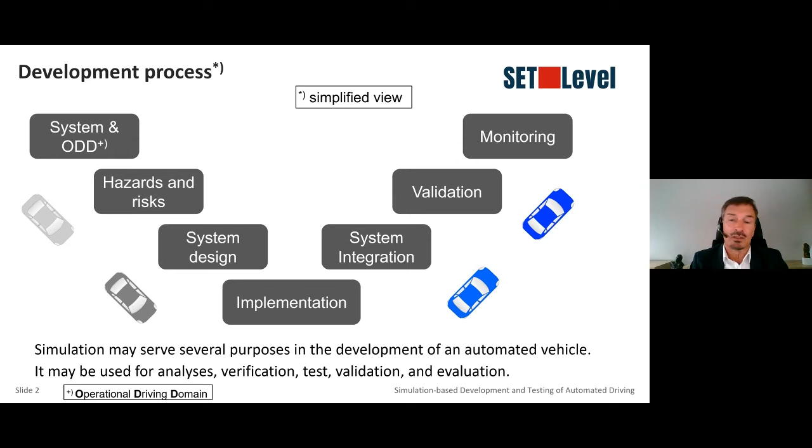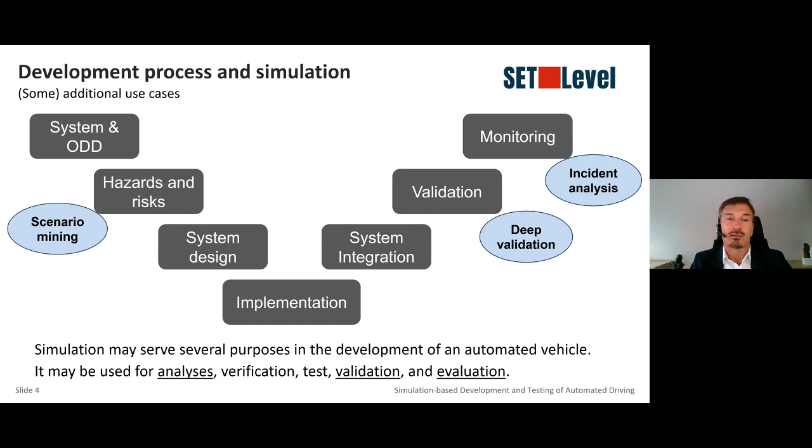So here's a reminder of what you might have seen in the morning, those 3 use cases. One was criticality identification and the hazard and risk analysis. Another one was component verification. And the third one was about closed loop analysis of system integration or system validation. Well, and in this talk, I will sketch 3 more use cases. One, again, concerning the hazard and risk analysis by mining for scenarios which are interesting, so to provide databases for this hazard and risk analysis.

The second one is near to the end of the development of the automated vehicle. It's the validation of this vehicle, once it's completely developed and one wants to look how safe it really will be on the road, so whether all your colleagues have provided sound work results. And after the vehicle has been brought to the road, manufacturers will still be forced to monitor it to look for potential flaws in the automation, and then some incidents might occur, and these have to be analyzed whether they are attributable to the automation or to circumstances not controlled by it. So these are the 3 use cases I will sketch very briefly in my 20-minute talk.

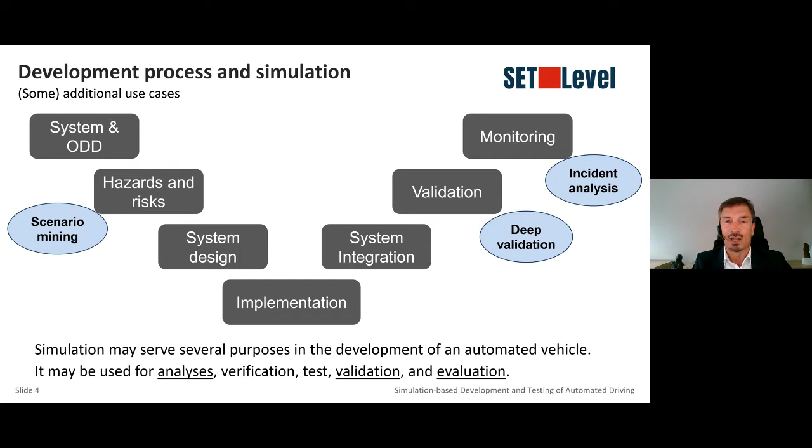The first one is scenario mining. That is to look broadly for all kinds of scenarios which might occur, which are interesting for the safety of our development, that is, which might turn out critical. So how do we do that? In SET Level, we develop a platform and simulation tools which implement the platform, which look in detail at scenarios, but they don't really generate scenarios; they are given scenarios. So to generate all these scenarios which we might be interested in for criticality analysis, we have to use some outside help. And luckily, this is available in the form of the tool SUMO, which is able to generate a broad range of scenarios by simulating traffic flows. And these traffic flows can be parameterized: dense traffic, less dense traffic, and other circumstances influencing that. And this we will then couple with a detailed analysis of what SUMO has generated.

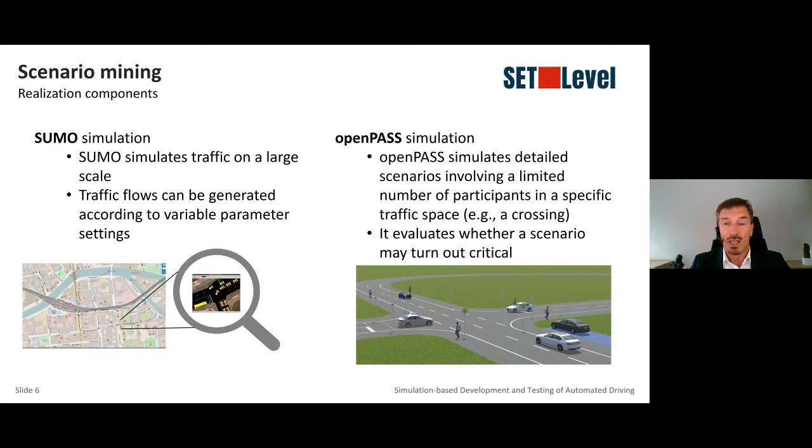Let's look at how those tools behave. We use SUMO on the left to generate all kinds of traffic situations at, say, a particular crossing, and then, as you might have seen this morning in the session on simulation use case 1, we can use OpenPASS to analyze what has been generated by SUMO on this crossing and look for potential criticalities, just as it has been proven able to do in the morning demonstration. And fortunately, our simulation platform is flexible enough to accommodate those two tools and let them interact to find critical scenarios.

Here's a little sketch of how this interaction behaves. We have 3 actors. On the left, we see the simulation management, which controls everything. Then we have in the middle the SUMO tool, which does the traffic flow simulation, integrated into our platform architecture by adding an FMU, functional mockup unit, wrapper. And on the right, we have OpenPASS, which is already integrated in the platform architecture.

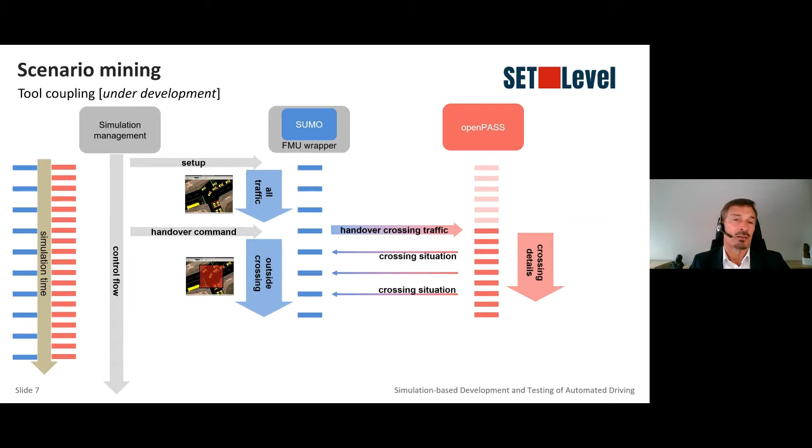The simulation starts by letting SUMO compute traffic flows until we have a stable flow, and then the really interesting thing starts. The simulation manager tells SUMO to hand over the situation at a particular crossing, and then OpenPASS takes over to simulate the traffic at this crossing in detail, while SUMO still takes care of the rest of the traffic flow through the town. But it is no longer responsible for the traffic on the crossing, which has been handed over to OpenPASS. And once OpenPASS has resolved the scenario given to it and produced a verdict whether the scenario might be critical or not, OpenPASS can hand control of the vehicles on the crossing back to SUMO, which is then again in full control of the simulation.

And the scenario which we have just studied via OpenPass in detail is then either stored if it has been interesting, that is potentially critical, or if it has been boring, well, then we can delete it. And then the same process starts over again. SUMO continues with its traffic flow simulation,

and at some point in time, the simulation management says, okay, let's again have a close analysis. And in this way, by having a broad, very flexible simulation of all urban traffic, we can generate a large base of synthetic data as a basis for the further hazard and risk analysis. So that was the first additional simulation use case, and it is currently under development within SET Level.

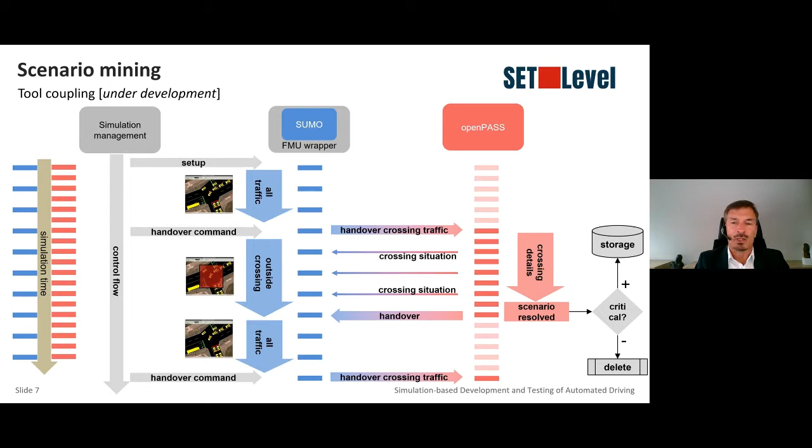So now to the second use case. It's about evaluating how safely the end result of the development will behave on the road. If you happen to remember what we did in PEGASUS with the simulation, well, that's pretty close to that. So what do we have to do to bring this step to life? So how do we set up our simulation?

First, we need to define in which traffic space we will do the evaluation. That is, we need a scenario catalog of logical scenarios, which covers the specific subset of the operational driving domain which we would like to analyze our SUT in. And then, well, we want to simulate our automated vehicle, so we better have a pretty good modeling of this vehicle, which we can feed into our simulation tools.

And then, of course, we need the simulation tool itself, and it better be, for this kind of analysis, a very credible simulation tool. Remember Hans-Martin Heinkel's talk this morning about the credible simulation process, which will be instantiated here to analyze how good the simulation tool will have to be and how this is going to be proved.

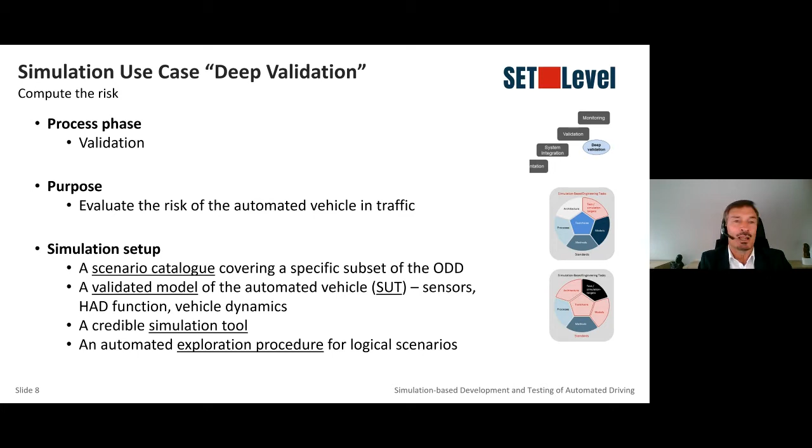Well, and then these are the ingredients for our core SET Level simulation. That is, we can execute single runs in our ODD. And well, with these single runs, we'll have to do our best to compute the overall risk which comes from bringing the automated vehicle into traffic. So this is a kind of elaborated procedure.

Now let's look in a little bit more detail at our task, what we have to do. We would like to compute the risk. How much risk is attributed to the automated vehicle in traffic? So the risk in a particular concrete scenario is here a numerical value, and depending on the parameters of the logical scenario, each parameter combination gives a concrete scenario.

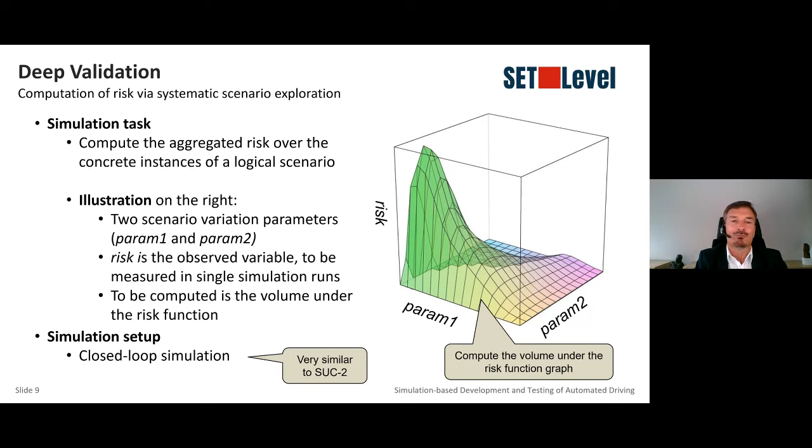That is, well, we would like to get the volume of the risk function graph by doing lots of single simulation runs. And this we do, well, in a way similar as Bernhard Riemann once defined what is the integral of a function, that is the volume under a function graph. That is by building it up, by approximating it,

making samples, in our case, sample simulation runs, which gives us single risk values, and then building columns around our single runs, our values which we have computed by simulation, and adding up the volumes of all these columns gives then an approximation of the volume of the risk function. That is an approximation of the risk we want to compute. And we do this, of course, in a, say, clever fashion.

If the risk is 0 or close to 0, we don't have to look too closely because, well, this area in the scenario space will not contribute significantly to the overall risk. So we can use our sample. We can choose our sample points very sparsely there.

You might have seen it on the right in the animation, where we have, say, a low density of sample points. And where it gets interesting, towards the left corner of this risk graph, we look more closely. That is, we do more simulation runs. And in this way, provided we have our credible simulation tools and well-modeled SUT, we get perhaps a good estimation of the real risk which comes from bringing the automated vehicle into traffic.

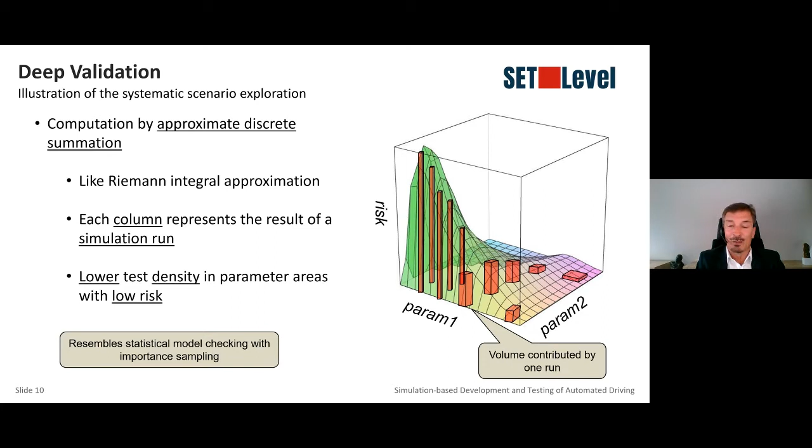Now, I promised you a third use case of simulation, that is after production, the incident analysis. The relevant process phase is monitoring when the vehicle is on the road. And of course, as you all know, manufacturers will mandatorily have to look at the behavior of the vehicle on the road and analyze the incidents which have been observed or which are observed in this phase.

And then, look for the cause of these incidents, whether they have been caused by the automation itself, by flaws in its design, or some situations which have not been fully foreseen during the development, which are maybe not really the fault of the automation, but the automation could behave better in these cases. Then again, the manufacturer will have to argue how to cope with these situations. And at first, he has to know the cause of this incident and what can be done about it. So we need a deep analysis of all these incidents on the road, and there will be many.

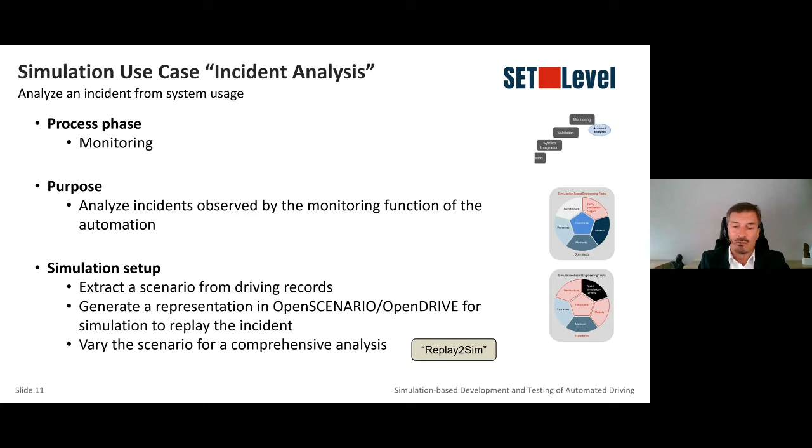So to support this by simulation, we proceed as follows. We first extract the scenario from the driving records, and then we make it simulatable. That is, we turn it into an OpenSCENARIO, OpenDRIVE description of what has gone on the road, make it into a scenario space, so to make it variable, add parameters to it. And then we analyze this concrete scenario and its vicinity, the neighboring parameter settings, and do this all in a replay-to-sim approach to be able to find the causes for what went wrong.

Okay, that is, we have 3 steps. The scenario extraction, which is mostly automatic. That is, we get these reports which are tagged by criticality values, and then we can select these reports which should be analyzed more closely. Okay, this is an automatic step. And then the next step is much more interesting. That is, make this incident report simulatable.

Main problem here is to find an OpenDRIVE, OpenSCENARIO representation, which is amenable to simulation, to variation of parameters, and so on. This is, I must confess, not a functionality which SET Level will provide, but there are projects with which we cooperate, and these projects work on tools which support this step. Though I guess that some of the steps necessary to realize it will still be manual, so only partly automatic. And also some research is needed to make the end result a real good basis for the further analysis. Now, the analysis again will be partly automatic and in the end perhaps fully automatic.

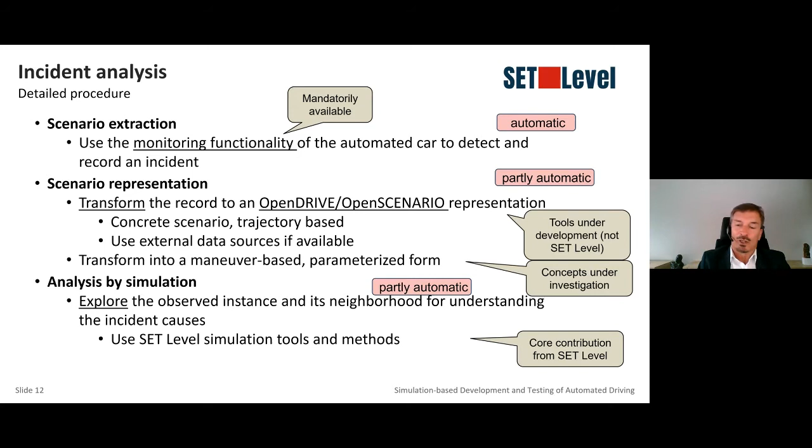And let me summarize by looking at all the use cases we see, which might support the development of an automation. In this talk, I've talked about scenario mining, that is getting a broad database to support the hazard and risk analysis, broadly generating synthetic data, which can be used then for every kind of analysis you might like to have. That is by categorizing them and making all kinds of abstractions, evaluations, and so on, the standard behavior in hazard and risk. But now you have a large database which adds to your expert knowledge and gives you reasonable assurance that you don't overlook too many in your hazard and risk analysis.

The other one was the interesting problem of deep validation, very much the thing which PEGASUS also thought about and developed contributions to. And the third use case I presented was monitoring afterwards and finding explanations. We all know that in the aerospace domain, this is standard procedure, and also in the railway domain, and it will take up lots of resources in the automotive domain as well, of course.

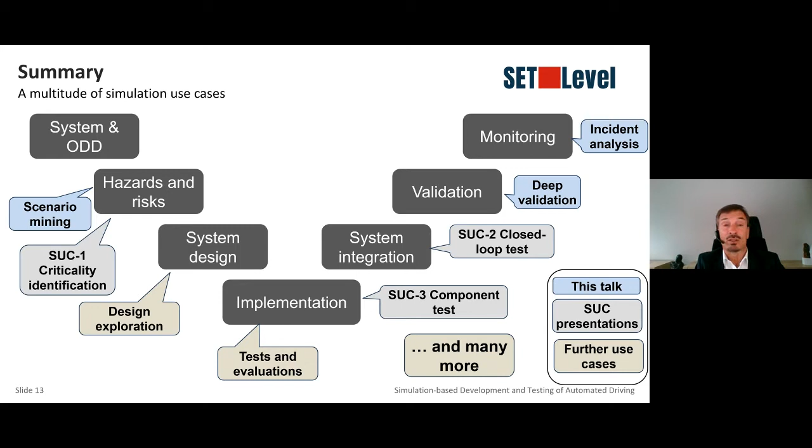This, of course, does not comprise all of the use cases we have or we envision for simulation and our SET Level results. There are lots more. For instance, during your system design phase, you might turn part of your design, for instance, your automation control strategy, into a model which you can put in a simulation to have a first check how your designed control strategy will behave, to get early feedback to improve on your design before it's going to be implemented.

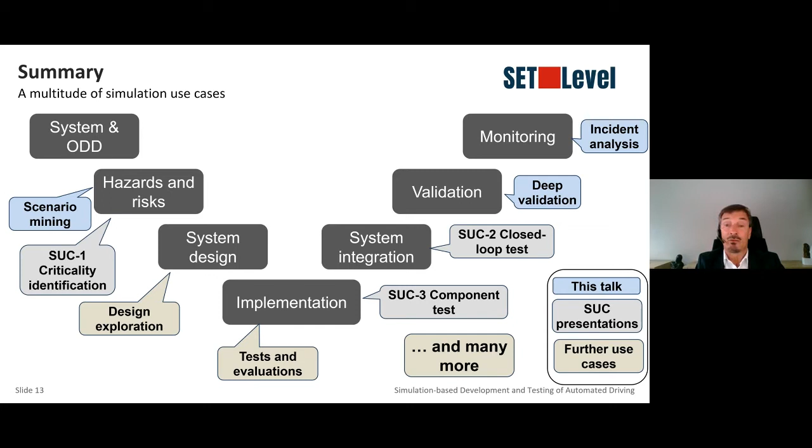And during implementation, of course, you don't need much fantasy to see that there are lots of readily available use cases for simulation, where simulation helps to test and evaluate the implementation results. And of course, there are furthermore use cases. Not all of these usages of simulation will have dedicated support by the results of our project, of course. We have limited resources after all, but some of them will.

And of course, the demonstrated simulation use cases this morning will have. Well, we have something to show already, and we will improve on that. So in the end, these will be ready-to-use cases for simulation once you have tools and installed them in your environment, instantiated them. So you have a blueprint and you have much of the work already done. So ready to use for you. Tests and evaluations will also not pose much of a challenge, as I already mentioned.

And well, we will also have some instance of this scenario mining available to get a broad database for hazard and risk analysis. But this will also need some further development for your particular application. Some others are not realized in SET Level as demonstrations of our tools and how they can be applied, but these are easily realized using our results. And in implementing them, you will profit from the open standard-based modular approach of our simulation platform and the implementations, which give the necessary flexibility to get into new use cases of simulations.